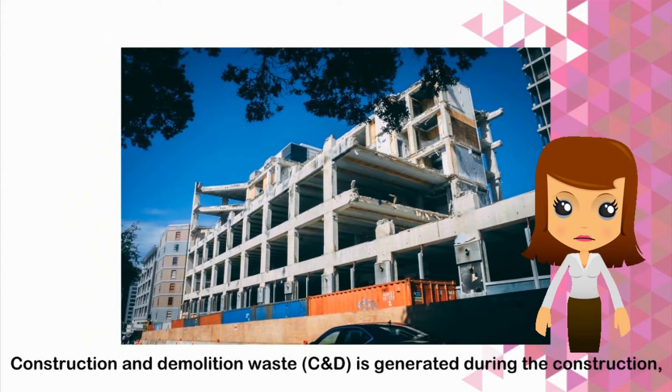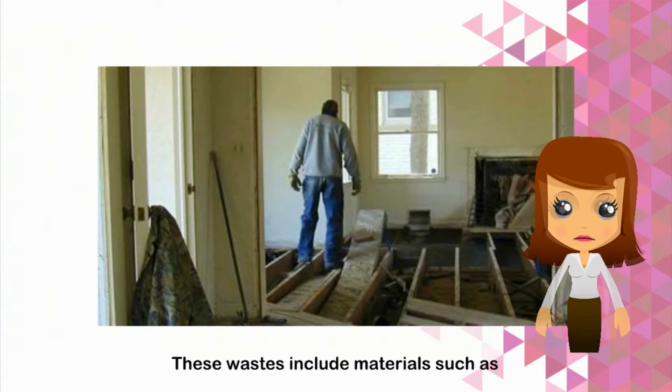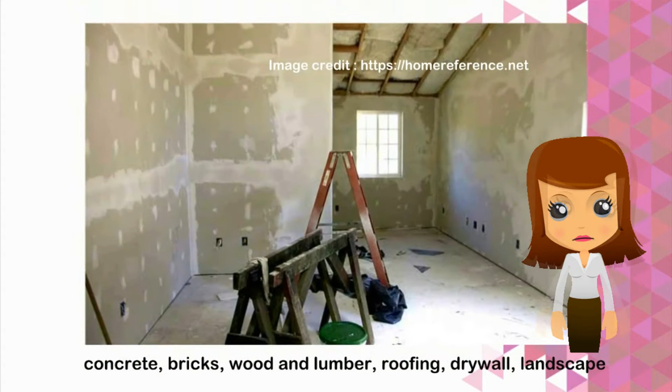This topic will talk about construction and demolition waste. Construction and demolition waste is generated during the construction, renovation, and demolition of buildings or structures. These waste include materials such as concrete, bricks, wood and lumber, roofing, drywall, landscape, and other waste.

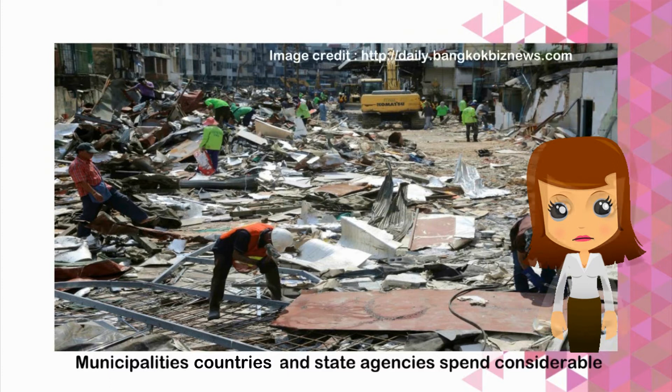Alternatives to disposal. Municipalities, counties, and state agencies spend considerable amounts of money each year to remodel, remove, or demolish structures. Finding alternatives to disposal can be a sustainable and competitive option. The key to effective material recovery and waste abatement is to identify which alternatives will work for you.

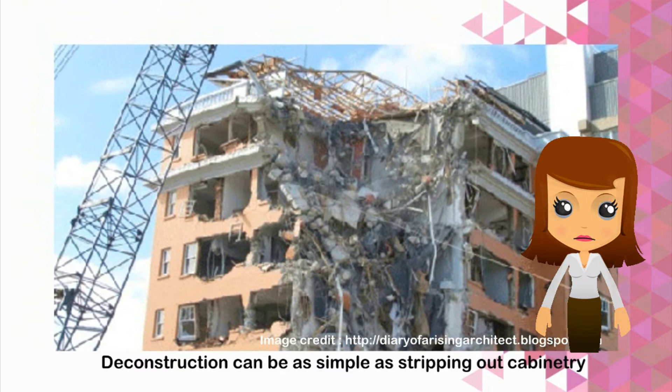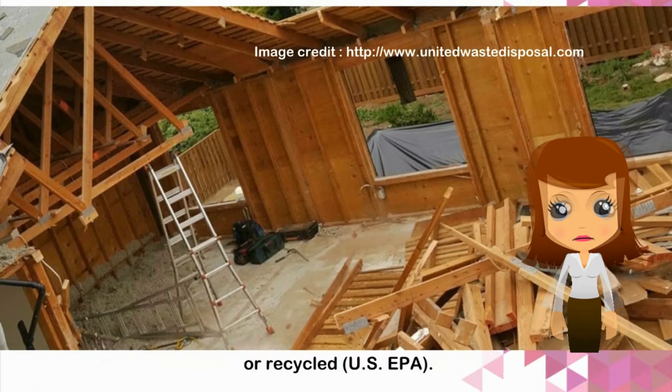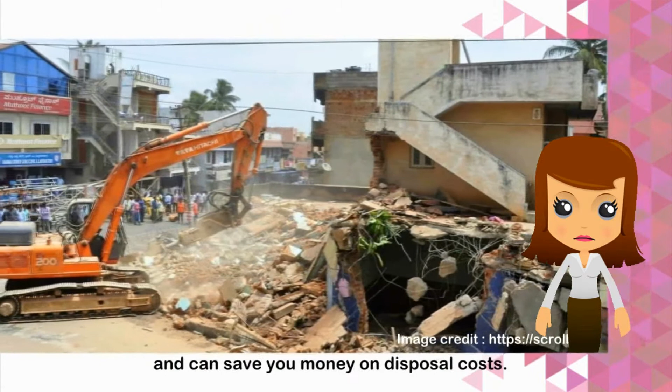Deconstruction. Deconstruction can be as simple as stripping out cabinetry or as involved as dismantling a building frame by frame. More than 70% of a deconstruction project can be reused or recycled. Deconstructing can be an integral part of demolition and can save you money on disposal costs. It also offers opportunities for lower-cost building materials through salvage and reuse stores.

There are two general categories of deconstruction. Number 1, non-structural, also known as salvaging, where high-value materials such as appliances, doors and windows, lighting fixtures, cabinets, and other finished materials are selectively reclaimed.

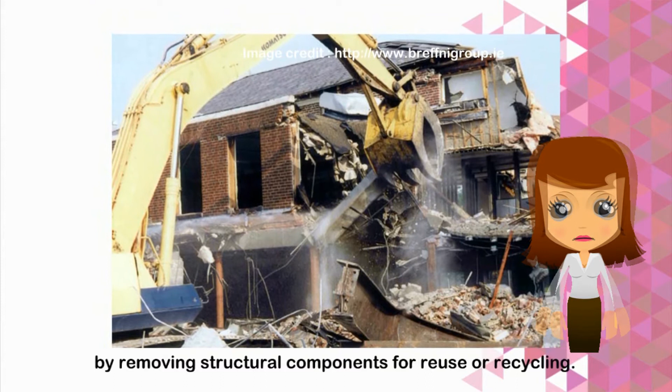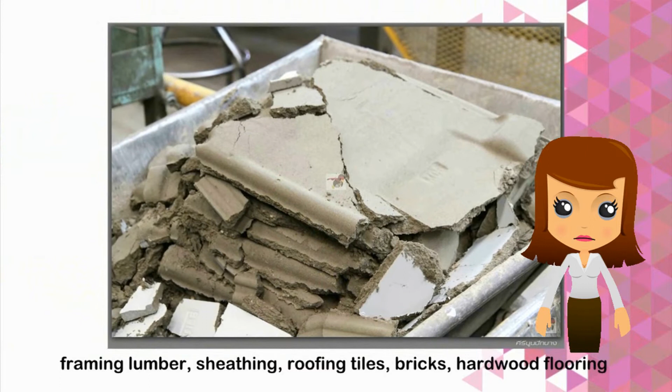Number 2, structural. Goes further than salvaging high-value materials by removing structural components for reuse or recycling. It can include materials such as framing lumber, sheathing, roofing tiles, bricks, hardwood flooring, or old growth timbers.

Salvage and reuse. Salvage, also called non-structural deconstruction, reclaims high-value materials from buildings prior to demolition. Cabinetry, appliances, lighting, and plumbing fixtures, hardwood flooring are a few examples of materials that can be salvaged. It gives a second life to materials and leads to new jobs and economic opportunities.

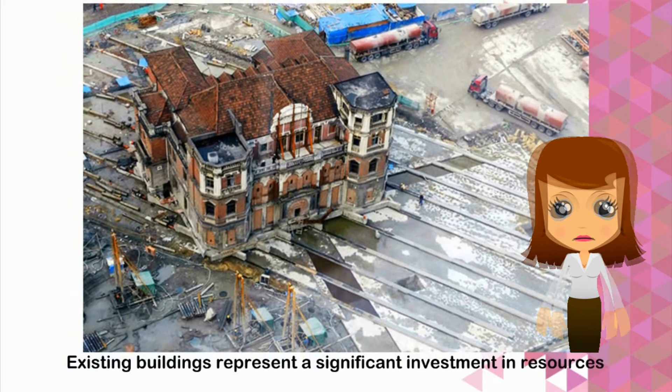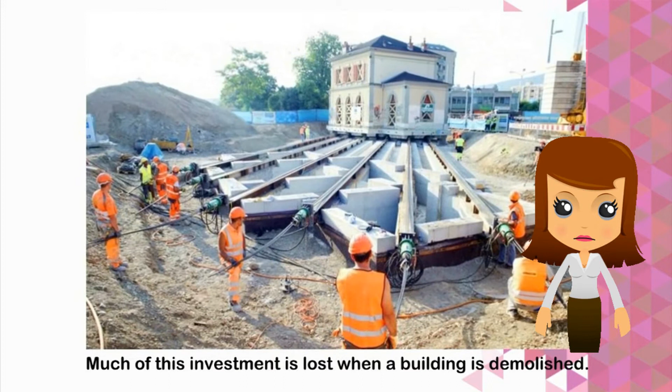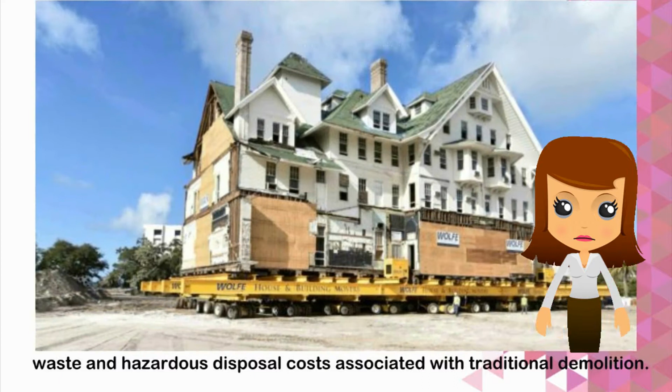Moving buildings. Existing buildings represent a significant investment in resource, time, material, energy, and money. Much of this investment is lost when a building is demolished. Relocating a building can eliminate the labor, waste, and hazardous disposal costs associated with traditional demolition. In addition to a return on investment, there are many benefits of relocating a structure.

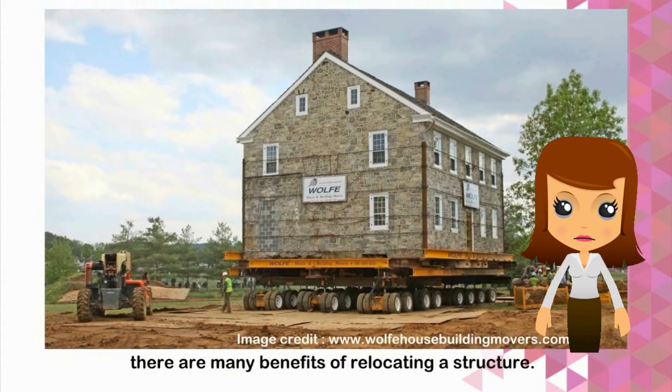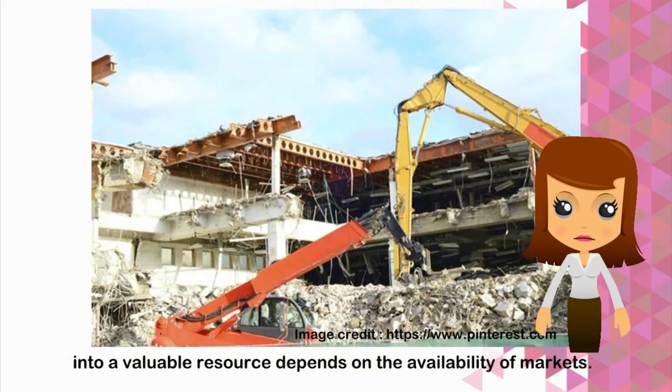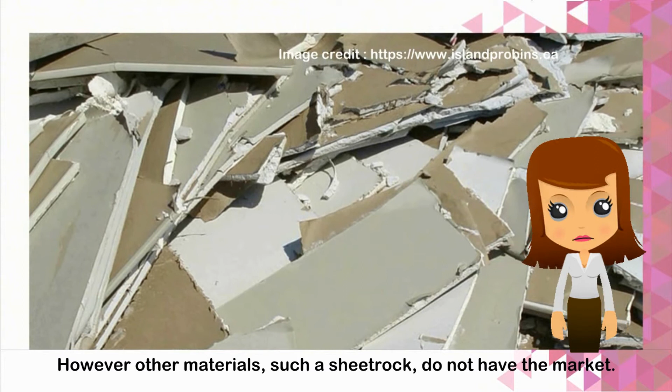Recycling. Turning the 1.6 million tons of construction and demolition waste into a valuable resource depends on the availability of markets. Some materials, such as cardboard, metals, and plastics, have established recycling markets. However, other materials such as sheetrock do not have the market. This poses a challenge and opportunity for construction and demolition recycling.

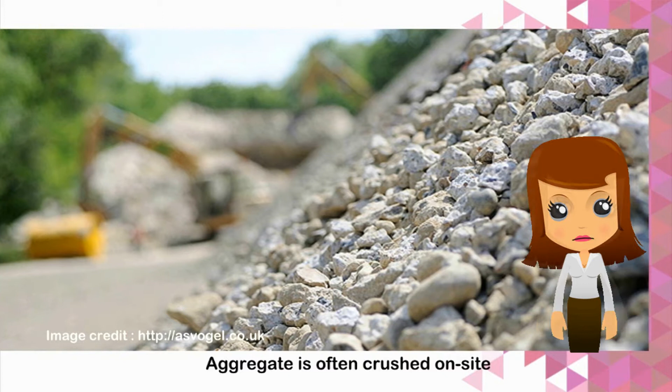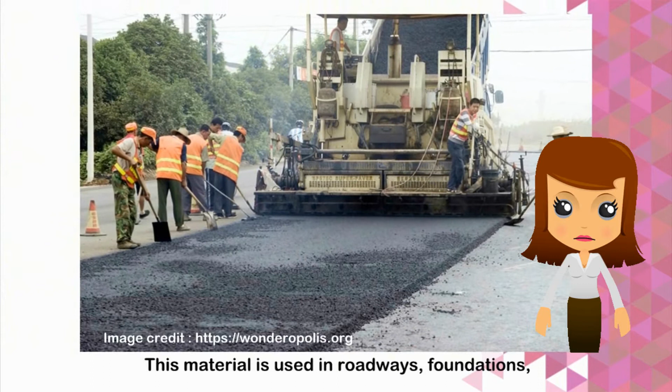Common construction and demolition waste. Aggregate represents 15% of the waste stream. It includes concrete, asphalt, and brick materials. Aggregate is often crushed on site or sent to a construction and demolition material recovery facility for processing. This material is used in roadways, foundations, and parking structures.

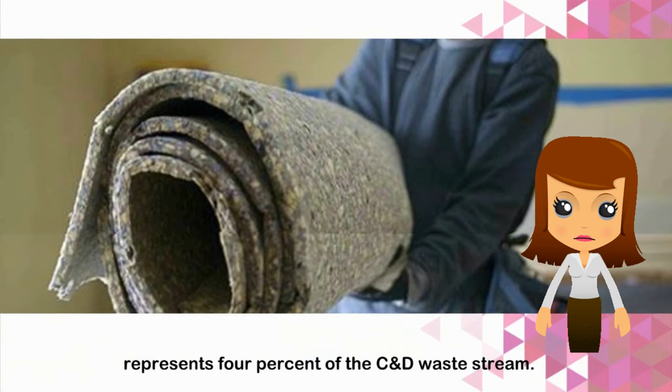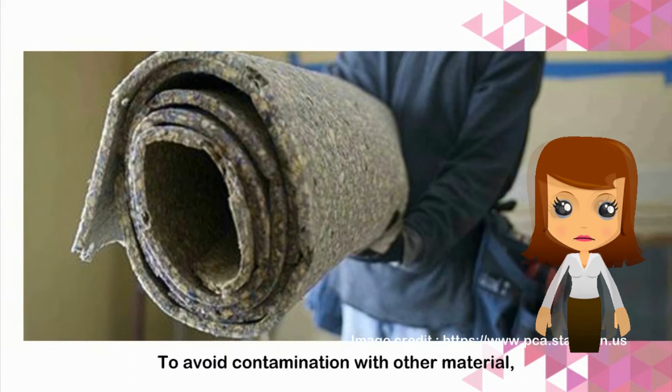Carpet and padding represents 4% of the construction and demolition waste stream. It's also found in mixed municipal waste. To avoid contamination with other material, it's best to collect and separate it on site during construction and renovation.

Metals make up 3% of the construction and demolition waste stream and consists mainly of aluminum, copper, and steel. If large enough volumes are generated on site, metal recyclers will sometimes offer containers at a low or no cost to cover transportation cost.

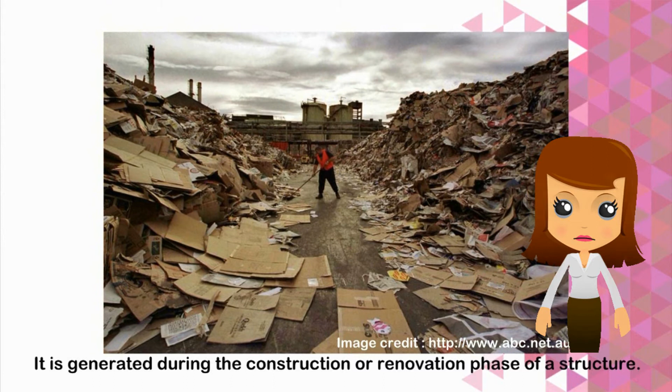Paper mostly comprises corrugated cardboard. Accounts for 3% of the waste stream. It is generated during the construction or renovation phase of a structure. Paper is either collected separately or mixed with other materials for separation at a construction and demolition material recovery facility. Other paper materials are excellent candidates for mixed biomass fuel.

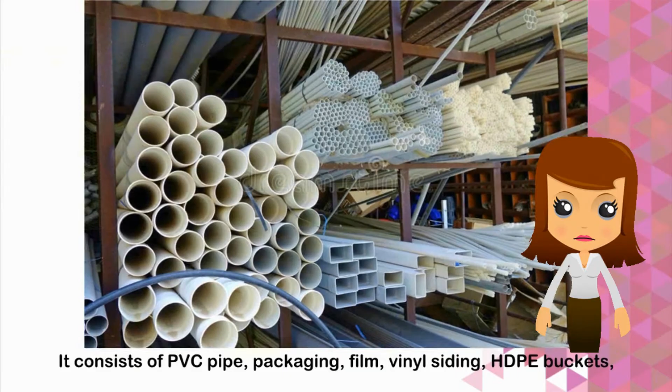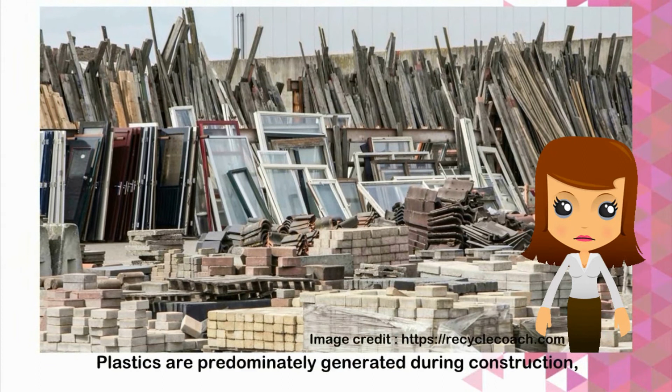Plastic makes up approximately 4% of the construction and demolition waste stream. It consists of PVC pipe, packaging, film, vinyl sidings, HDPE buckets, and other plastic material. Plastics are predominantly generated during construction, renovation, and demolition.

As with all materials, the less contamination, the better the marketability. Plastic would be better collected separately at the job site. Plastics that are contaminated or have no market are good candidates for mixed biomass fuel.

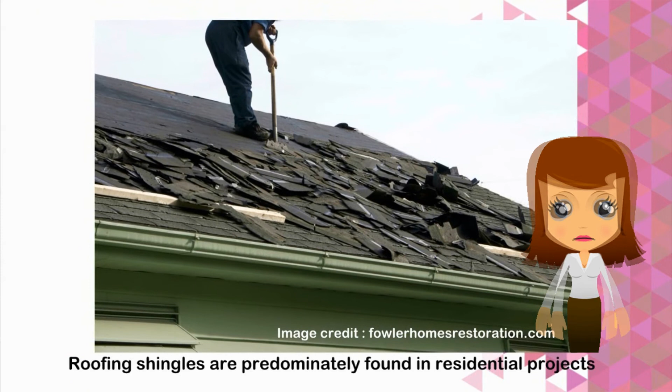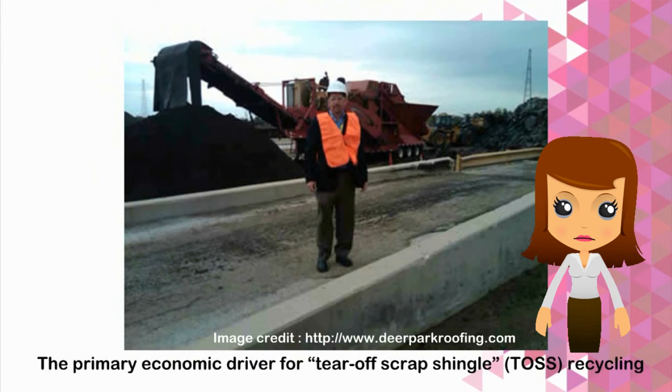Roofing shingles are predominantly found in residential projects and represent 15% of the construction and demolition waste stream. The primary economic driver for tear-off scrap shingle recycling is the virgin asphalt cost savings derived by hot mix asphalt producers.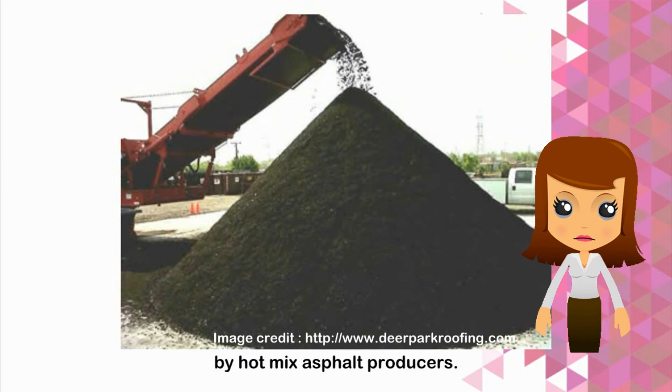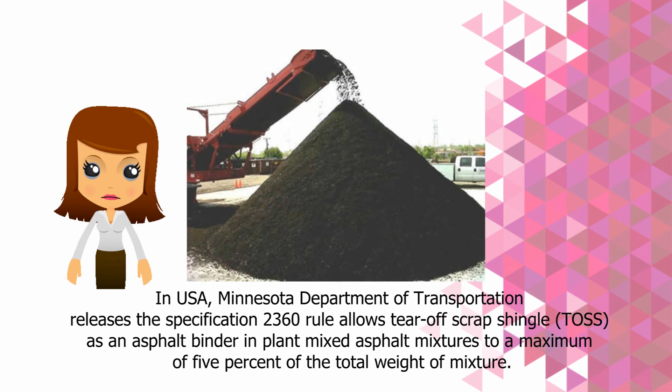In the United States of America, the Minnesota Department of Transportation released Specification 2360, a rule that allows tear-off scrap shingle as an asphalt binder in plant mixed asphalt mixtures to a maximum of 5% of the total weight of the mixture.

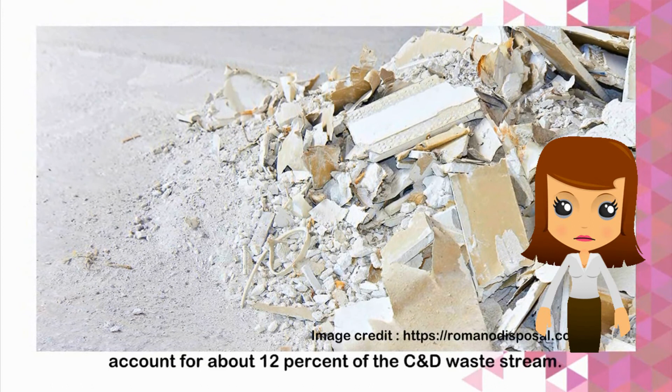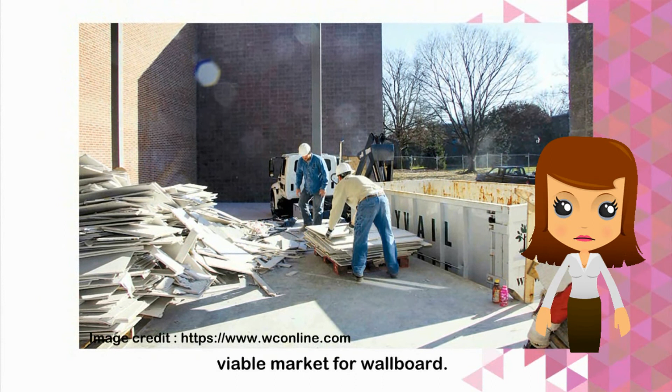Wallboard, often referred to as sheetrock or drywall, accounts for about 12% of the construction and demolition waste stream. Currently, it does not have an economically viable market for wallboard.

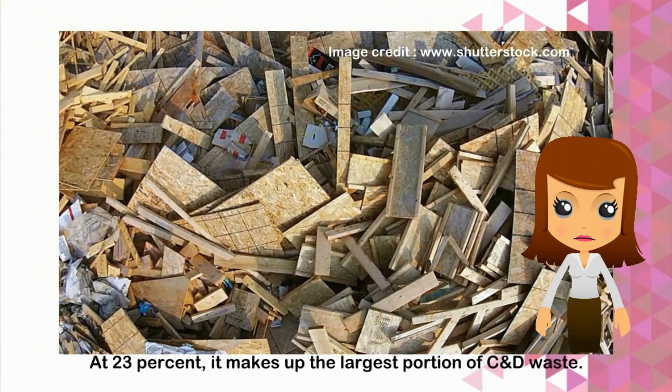Wood material can be recycled for a variety of uses. At 23%, it makes up the largest portion of construction and demolition waste. There are two broad categories of wood. Number 1, clean wood.

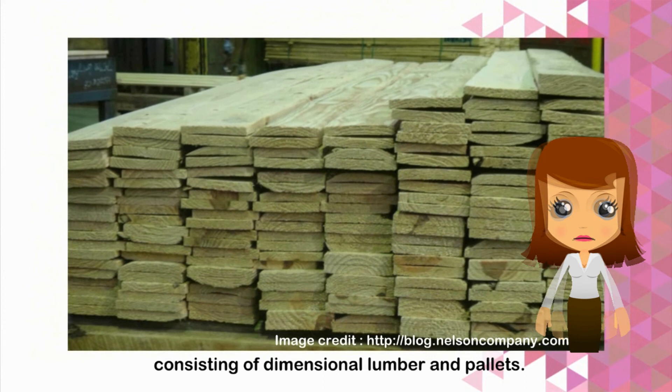Clean wood includes tree waste and non-treated wood, consisting of dimensional lumber and pallets. Clean wood is used for animal bedding, landscaping material, and clean biomass fuel.

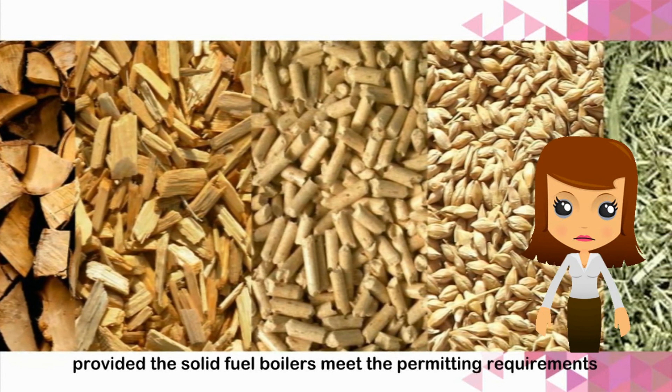Number 2, mixed wood. Includes manufactured wood products such as plywood, painted wood, particle board, and furniture. Treated or manufactured wood can be used for mixed biomass fuel, provided the solid fuel boilers meet the permitting requirements and air pollution control equipment standards.